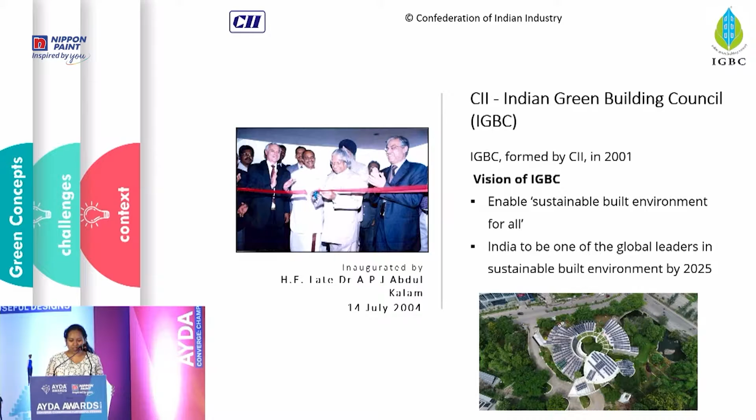Our headquarters, which is in Hyderabad, was inaugurated around 2004 by late Dr. APJ Abdul Kalam, and it was envisioned as a demonstration building where we wanted to practice what we preach. When it was constructed in 2003, it was India's first platinum-rated green building, and it was the greenest building in the world at that time. Even today, we have a lot of visitors who come to take a tour of the building and understand what green features have been implemented in our premises.

We also went one step ahead, and in 2019 we achieved the net zero energy rating for the building. This was achieved by installing bifacial solar panels on the rooftop, which was able to offset whatever energy was consumed by this particular building.

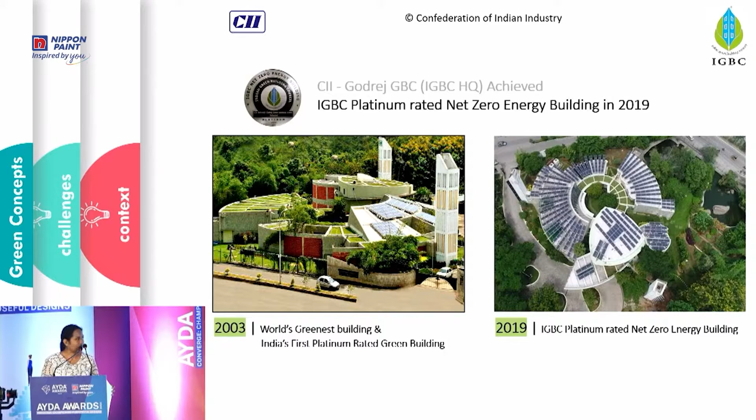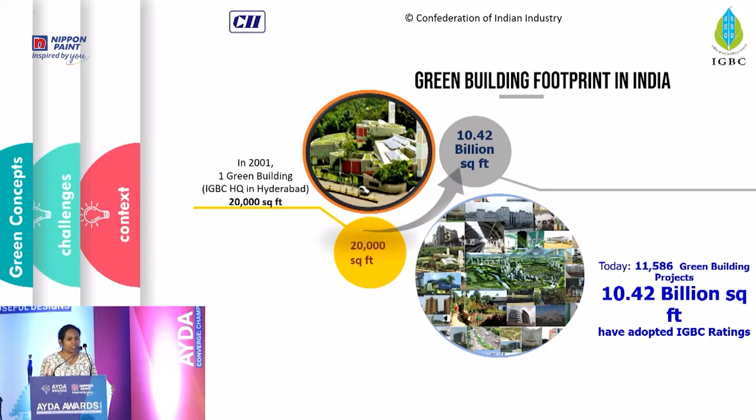To give you an understanding of the green building movement in India, what started in 2001 with one green building of around 20,000 square feet has grown now to almost 10.42 billion square feet of green building footprint, with over 11,500 projects which have adopted these IGBC ratings.

We have developed IGBC ratings for different typologies of buildings - for commercial buildings, residential buildings, industrial buildings, and even for metro stations and railway stations. The main intent was that all of the places where we stay, live, and work should go green.

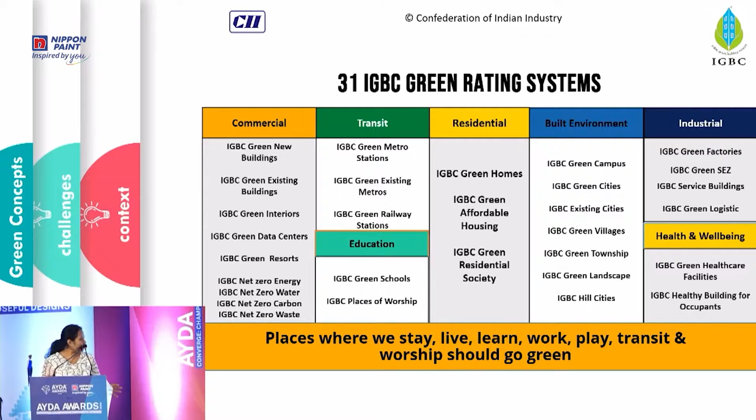So what exactly is a green building? A green building is one which conserves natural resources, uses less water in its operation, and optimizes the energy conserved in the building. It generates less waste and also promotes a healthy environment and improved indoor environment quality.

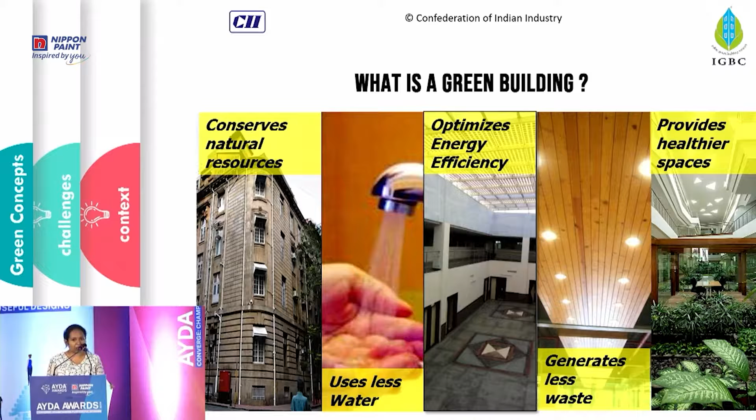The notion everybody usually has is that green buildings cost more compared to any conventional building. But it is important to understand that we have to look at the life cycle cost of the building - all of the operational savings you may have in terms of energy and water will offset whatever initial incremental cost you might incur.

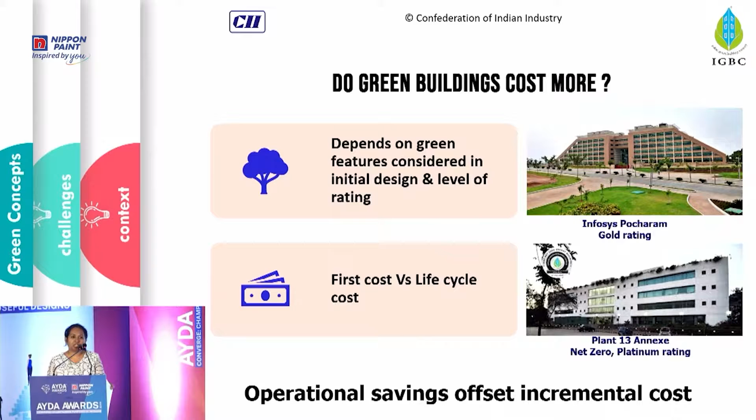We did a study to understand the incremental cost associated with a platinum-rated green building. Back in 2003, this was about 18%, majorly because many innovative technologies and solutions were not available in India and most of it had to be imported. But over the years a lot of technologies are available in our market itself, and this incremental cost has come down to almost only 1 to 2% for an IGBC platinum certified building compared to a conventional building.

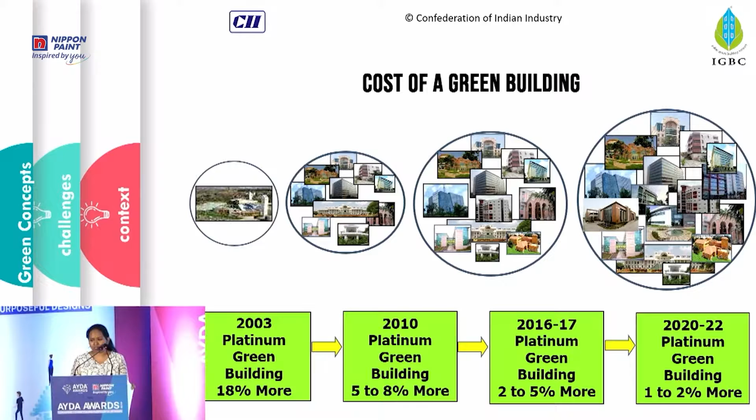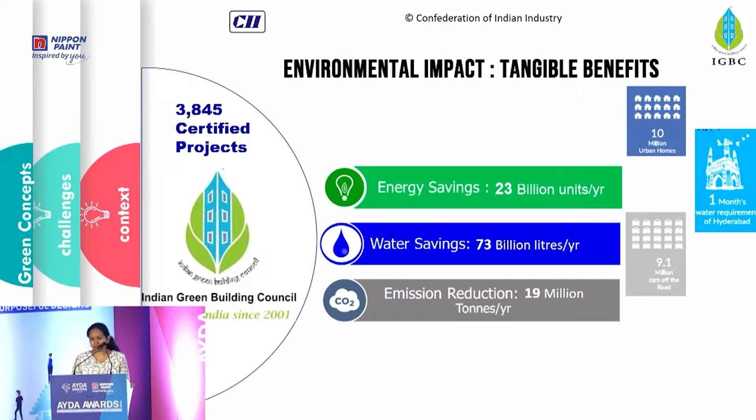Looking at the environmental impact associated with 4,000 certified projects under IGBC, we have anticipated energy savings of about 23 billion units per year, equivalent to 10 million urban homes. In terms of water savings, it's to the tune of 73 billion liters per year, almost equivalent to 1 month of water requirement of Hyderabad. In terms of emissions reductions, it offsets almost 19 million tons of carbon dioxide emissions per year, equivalent to almost 9.1 million cars taken off the road.

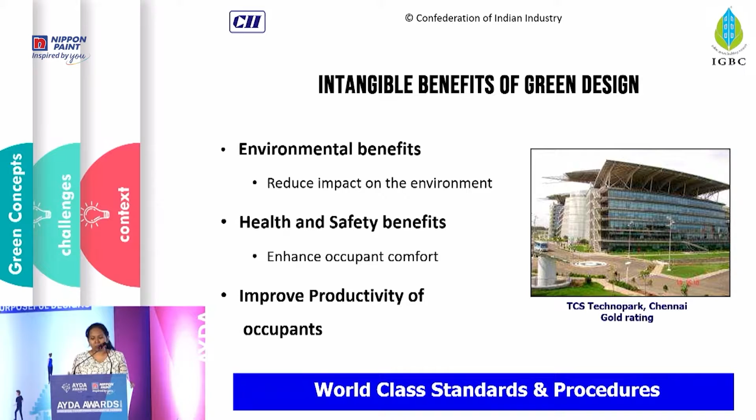With respect to green buildings, you have tangible benefits as well as intangible benefits. We also have intangible benefits associated with green buildings, like enhanced occupant comfort and increase in productivity. This is majorly attributed to the indoor environmental quality of the spaces.

Just to give you an understanding of the impact which the building and construction sector has: if you look at the graph, almost 28% of global carbon dioxide emissions is from building operations, and around 11% is from building materials and construction. So overall, around 40% of global CO2 emissions is from the building and construction sector.

In terms of energy consumption, the sector contributes around 25 to 40%. In terms of waste generation, around 30 to 40% of waste is generated by the construction sector. And in terms of water pollution, it contributes around 20 to 30%. So this gives you the understanding of the impact which the sector has and the need for us to go sustainable.

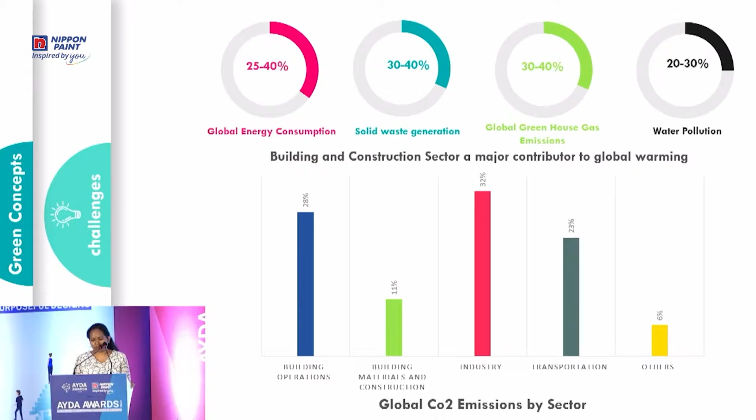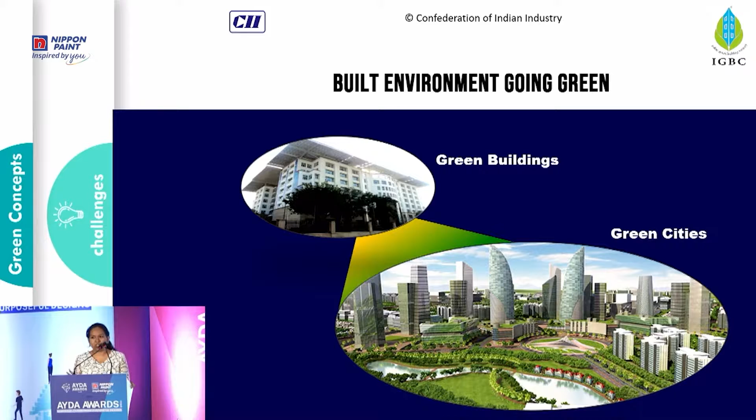So it becomes very important for us to make the built environment go green. Right from green buildings all the way to green cities, we have to design in a sustainable way to ensure that we reduce this impact on the environment.

So let's look at some of the concepts which are associated with green buildings.

Natural topography or vegetation is very important in any project, mainly because this vegetation helps in promoting local biodiversity. Wherever possible, you have to ensure that you try to preserve the natural topography or vegetation which is there on your site. And if it's not possible to preserve it, you can look at ways to incorporate it as part of your design.

You can have it over built structures, as part of terrace roofing, or on top of a podium. So you can look at various ways in which you can integrate your design with the vegetation.

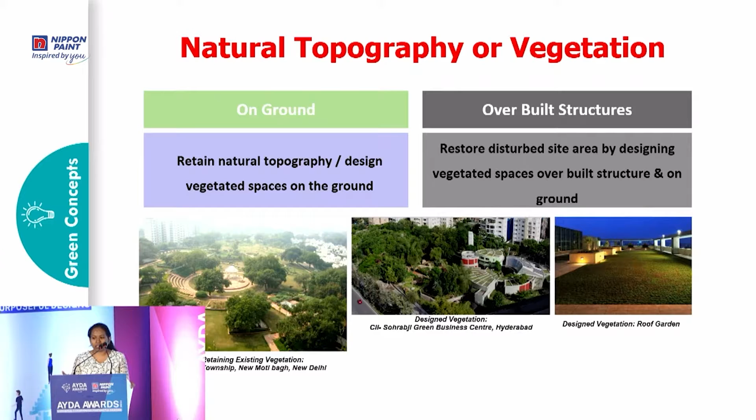Heat island is another phenomenon which is prevalent in major metro cities, mainly attributed to the development which happens in urban cities. Most cities are like concrete jungles, with a lot of concrete surfaces prevalent. These concrete surfaces absorb solar radiation and emit it in the form of heat, causing an increase in the ambient temperature.

If you look at the graph, you can see that the ambient temperature at the city, where there is a lot of urban development, is higher compared to the nearby suburban or rural areas where the temperature is much lesser. So we have to look at how we can mitigate this heat island effect.

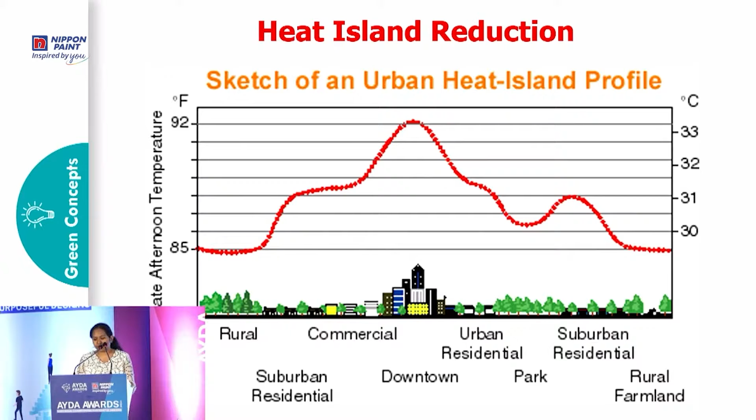Let's look at two ways in which we can mitigate this heat island effect: one is the non-roof areas and the other is the roof areas. Your non-roof areas consist of all your paved areas, including driveways, pathways, and parking spaces. You have to ensure that you try to shade these spaces with the help of tree cover, or look at using some kind of open grid pavers or grass pavers.

In open grid pavers, there is a gap prevalent between two pavers. This gap basically acts as a thermal break and prevents the conduction of heat. Grass pavers are both aesthetical and also help in providing a cool environment. So these are some of the options you can consider in your non-roof areas for mitigating the heat island effect.

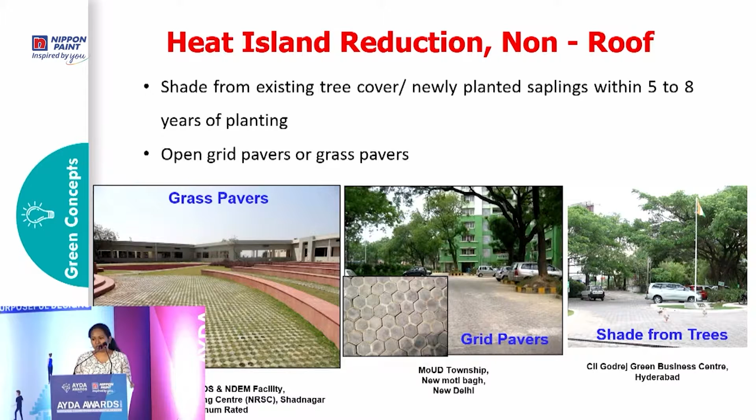Coming to the roof or terrace area, you have to consider high reflective materials on your roof area. These can be either high reflective paints, high reflective tiles, or you can even consider something as simple as China mosaic roofing, where you can reuse all your broken tiles to provide a China mosaic roofing.

Or you can also look at how you can have a roof garden, with a vegetative roof on your terrace, or a combination of both of these.

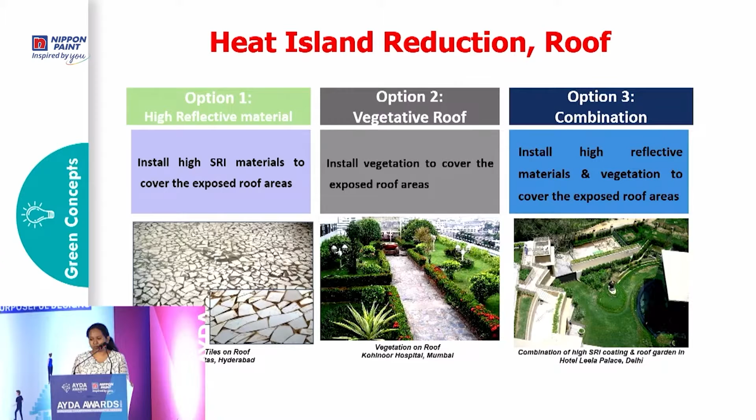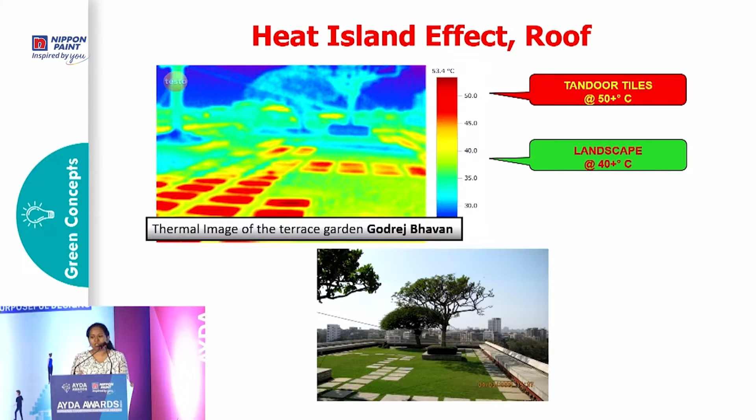Water is another very important concept when it comes to green buildings. We have to follow the 3R principle for water efficiency: recharge, reduce, and reuse. Generally we have the tendency of always drawing water from groundwater sources without replenishing them, so we need rainwater harvesting structures in the project to replenish these sources. We also have to choose efficient fixtures in washrooms to reduce water consumption. The third R, reuse, means wastewater generated in the building should be treated and reused for flushing or irrigation purposes.

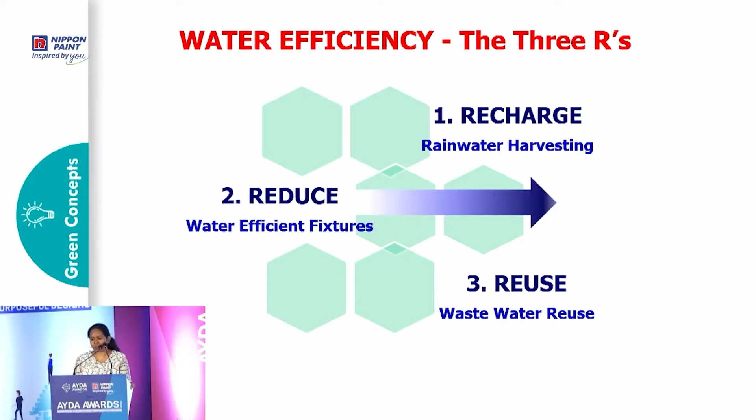Coming to the first R, recharge: in terms of rainwater harvesting, there are two options. You can collect rainwater on site and reuse it, either with a pond or water body, or a storage tank, channelizing all your stormwater drains to collect at this point. The other option is recharge, where you let rainwater recharge the groundwater table by planning percolation pits or bore wells.

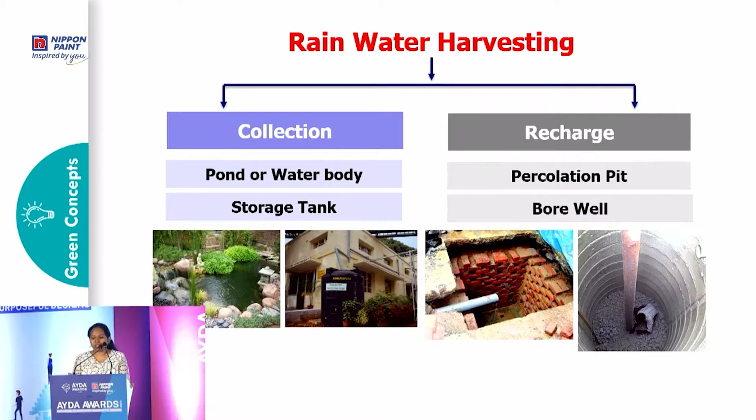Coming to the second R, reduce: we need to look at the plumbing fixtures used in the project. There are two types of fixtures—flow fixtures, which are your taps, health faucets and showers, and flush fixtures, which are your water closets and urinals.

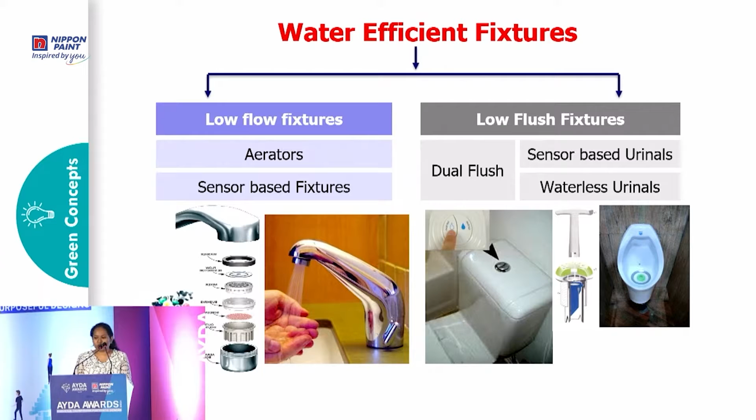For flow fixtures, you can consider using aerators, which are very economical and easy to fit onto any fixture, restricting and reducing the water flow. For flush fixtures, new technologies like dual flush systems give you a half flush or full flush based on need. For urinals, you also have sensor-based and waterless urinals, which optimize the water consumed by the fixture.

Another important aspect of water conservation is irrigation requirement for landscaping. It's important to choose the right species in your landscape design to optimize irrigation needs. Generally we go for exotic and flowering species, which have high watering and irrigation demand. Instead, we should research native species available in that region, which generally require watering only in the initial sapling stages and afterward survive on their own based on the rainfall pattern of the region.

You can also consider drought-tolerant species like cactus or some varieties of palms, which require very little water. The third type to consider is adaptive species—not native to a region, but prevalent there for hundreds of years and adapted to its climatic conditions, also requiring very little water. These three species should be considered while developing your landscape design, avoiding exotic species to reduce irrigation water demand.

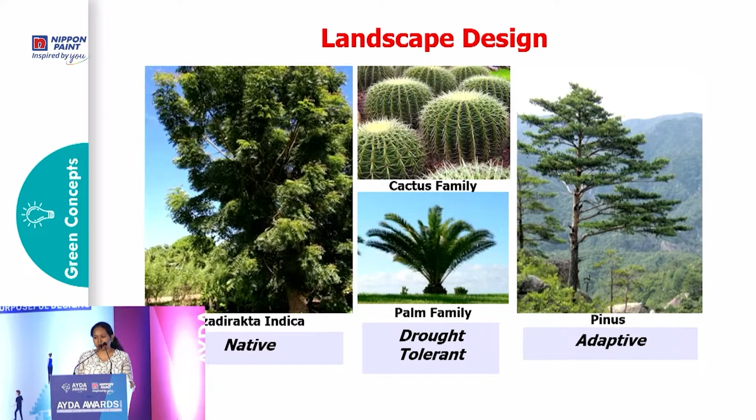One aspect of irrigation is the landscape design, and the other is the kind of irrigation system used. You need to choose an efficient irrigation system, and there are two types to consider. One is the sprinkler system, which is advisable for turf areas and can reach a larger surface area with very little water input—much less than a conventional hose pipe for watering turf.

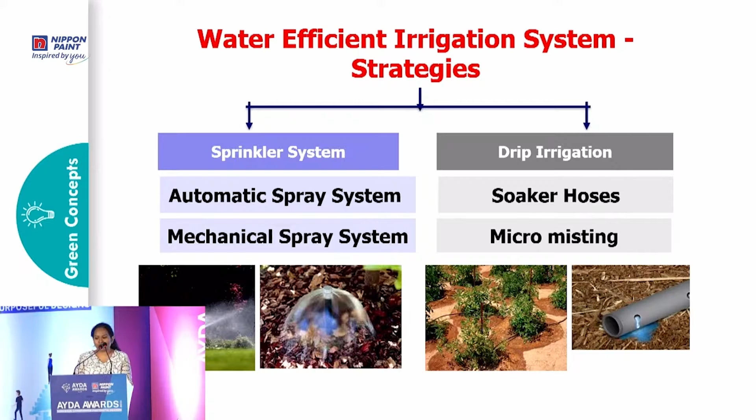Drip irrigation can be considered for other vegetation like shrubs and trees. In drip irrigation, pipes are laid across vegetation beds with holes from which water drips to the root zones. These are some of the efficient irrigation technologies you can consider compared to a conventional hose pipe system.

Coming to the third R, which is your reuse. Wastewater treatment is how we can treat the wastewater generated in your site, and then we can reuse this particular water for your flushing purposes or your irrigation requirements.

There are two types of wastewater treatment available. One is biological treatment, where you use plants, the root zone of the plants, to treat the wastewater, or you can go for mechanical treatment with the help of a sewage treatment plant. In both processes, the important process which happens is the aeration process, where you're basically adding air to break down the waste particles present in the water.

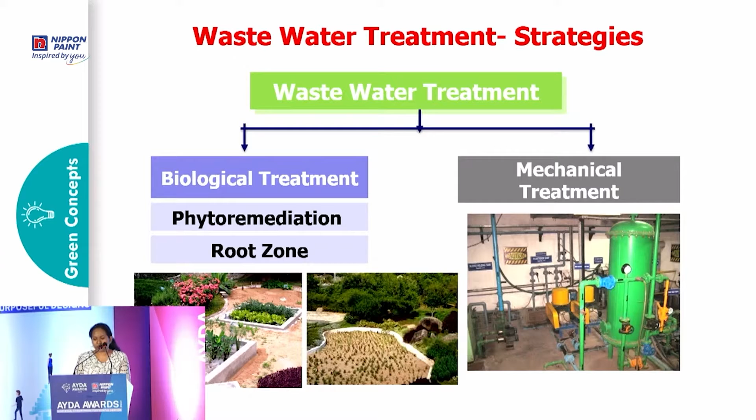If you look at this photo, this phytoremediation plant is from our headquarters. If you see, it might look like just a garden, and even if you walk around it, there is no foul smell which will emanate from this particular phytoremediation plant.

This process is again repeated in your polishing pond, which is your secondary treatment chamber. Once it comes out of the secondary treatment chamber, this water can be stored and reused for your landscaping or flushing purposes.

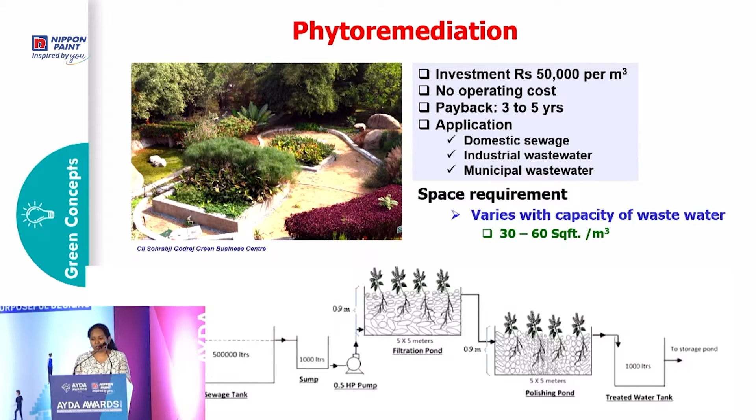Energy efficiency is very important when it comes to green buildings, because energy used for HVAC and everything will take up most of the operational energy used in a particular building. So how do we optimize this particular energy being used in your building?

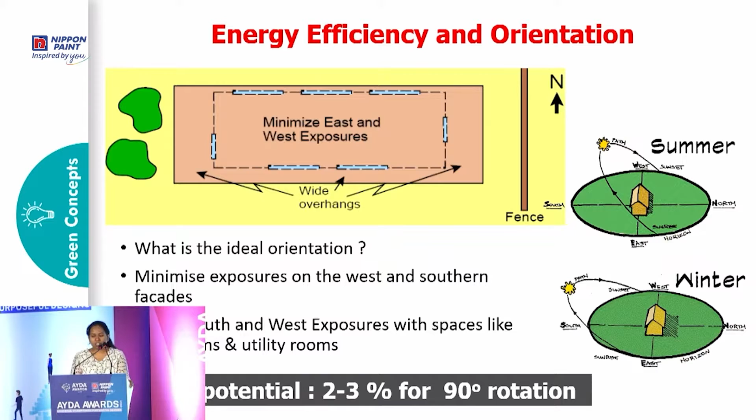You will have to ensure that you minimize your openings on the southern and western facades so that you can reduce the heat gain into your building. You can also plan for buffer spaces or service areas like staircases, washrooms, and utility spaces in these southern and western regions.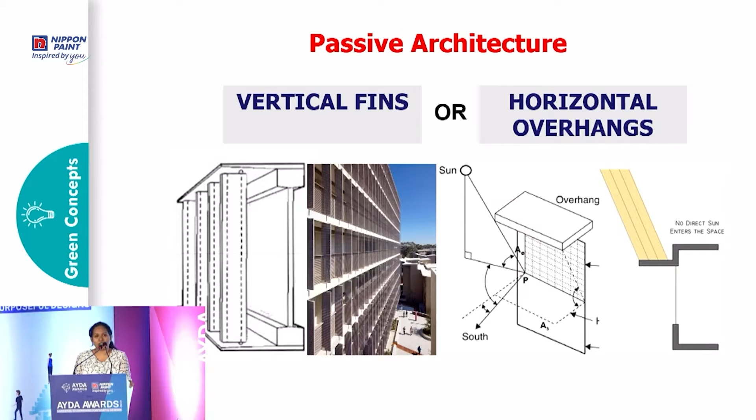Everybody knows the importance of vertical fins and horizontal overhangs. They also have to be properly designed to ensure that the heat gain inside your building is reduced.

There are also some passive technologies available, like earth air tunnels. They basically work on the principle that the earth remains at a constant temperature of about 22 degrees Celsius. In this technology, you take pipes to around 4 meters below the ground.

When your ambient air is around 30 to 35 degrees Celsius, the hot air is taken through this pipe to 4 meters below the ground, where it gets cooled by the earth, which is at a much lower temperature of around 22 degrees Celsius. Then this cool air can be taken to recirculate inside your building.

This also works in cities with extreme climates where winters are really cold. When your winters might be 4 or 5 degrees Celsius and your earth is still at the constant temperature of 22 degrees Celsius, you can take this cold air from outside to 4 meters below the ground and it gets warmed up. Then this particular air can be taken to recirculate inside your building.

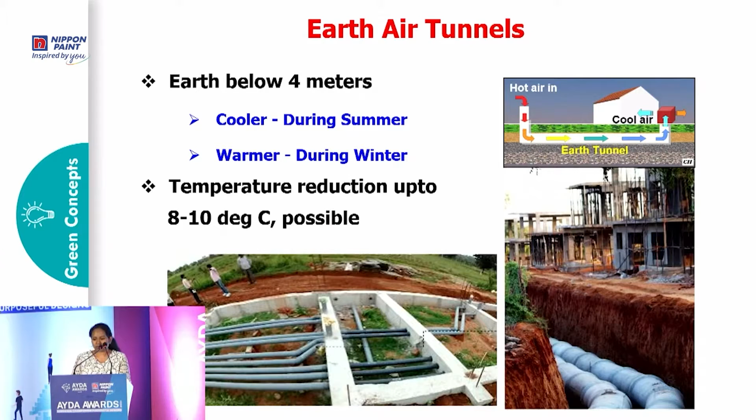Wind tower is another passive technology which can be used for passive cooling. What happens in a wind tower is that hot air enters from the top of the tower, and you have mist sprayers located at the top. These mist sprayers spray water particles and cool down this hot air entering from the top, so this hot air starts to settle down.

On the other hand, you have a solar chimney, which heats up the air inside your building and causes it to rise. There is a pressure difference which occurs, and it makes the cold air from the wind tower come inside your building. Through a wind tower, you can anticipate a drop in air temperature of around 4 to 5 degrees Celsius.

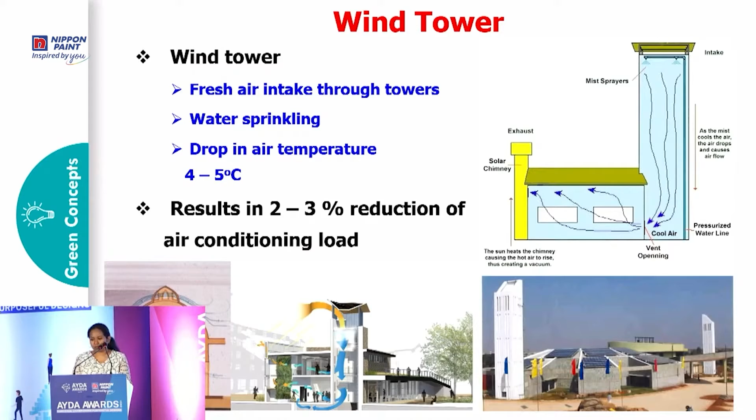Coming to building materials, in all of your projects you have to look at how you can reduce the dependence on virgin materials. Wherever possible, if it's an existing building, you can look at how that building can be reused. Or if it's a new development, you can look at how you can reuse salvage materials, or use materials with recycled content. You can also look at how you can source locally available materials, which will help in reducing the carbon dioxide emissions associated with transportation of materials.

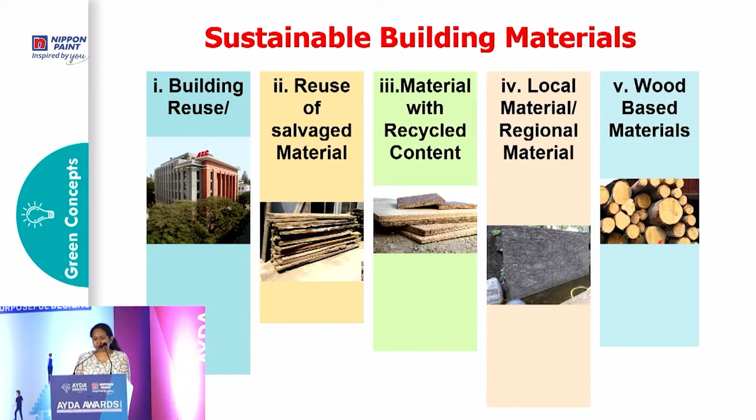This is an example of a project, the Ambuja Cement Corporate Office. Generally, the structure of a particular building has a life of around 60 years. What happened here is that they've gone for a major renovation and retained the structural elements of the building, only doing renovation in terms of the envelope and the interior. In this way, they have reduced the virgin materials used in the project.

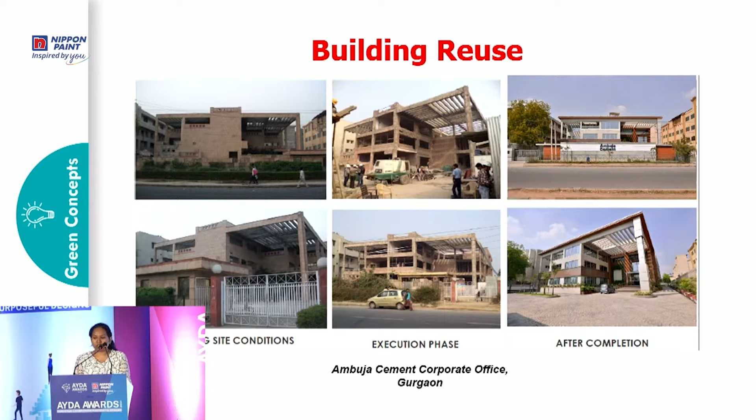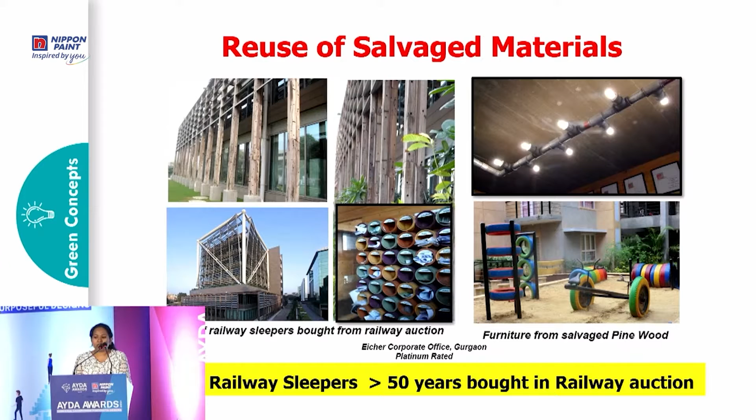You can also consider reusing salvage material. This is an example of the Eicher office in Gurgaon, where they have actually bought railway sleepers from a railway auction and used them as the double skin for the project. There are also some photographs showing how pipes can be used along with your lighting fixtures, and empty paint cans can be used for storing documents. So you can look at how you can salvage materials and reuse them in your project.

Coming to wood-based materials, you can consider two types of products. One is rapidly renewable materials - rapidly renewable wood is something which can be harvested in less than 10 years, including species like bamboo, bagasse, and eucalyptus. The other option is certified wood, which is wood harvested from forests that are responsibly sourced and managed, and these are environmentally conscious.

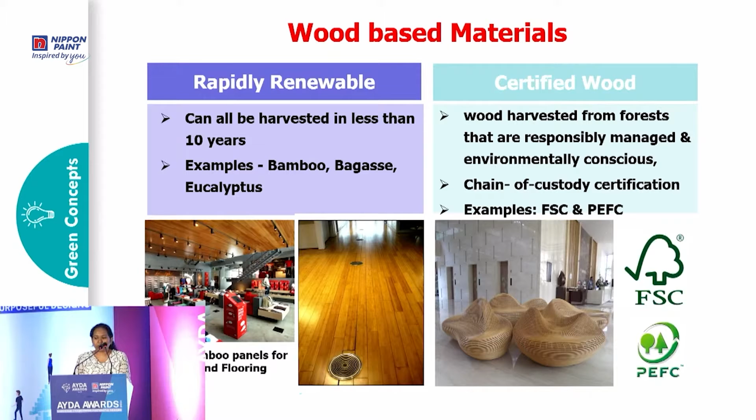In terms of waste generation, during project construction it is important that you manage the waste getting generated. First, you have to look at how you can minimize the waste generated during construction. The waste that is generated needs to be properly segregated and stored on site, so that it can be reused. For example, broken bricks can be reused for backfilling, and broken tiles can be reused in pavers and even terraces. This way you can reduce the amount of waste being sent to the landfill.

After reusing whatever waste is possible, the leftover waste should be associated with recycling vendors who can take up this waste and use it for recycling purposes, ensuring it does not go to the landfill.

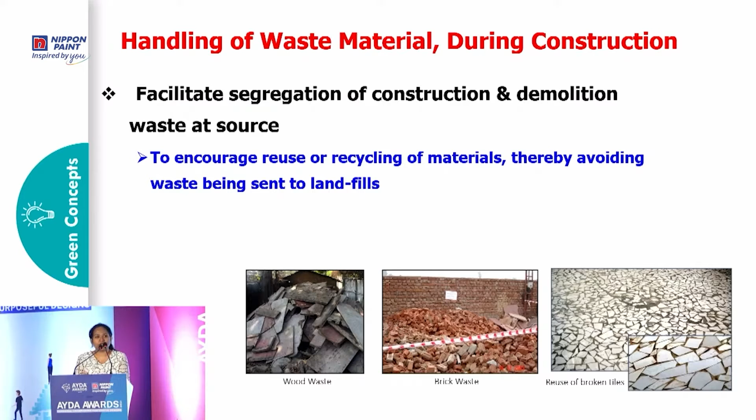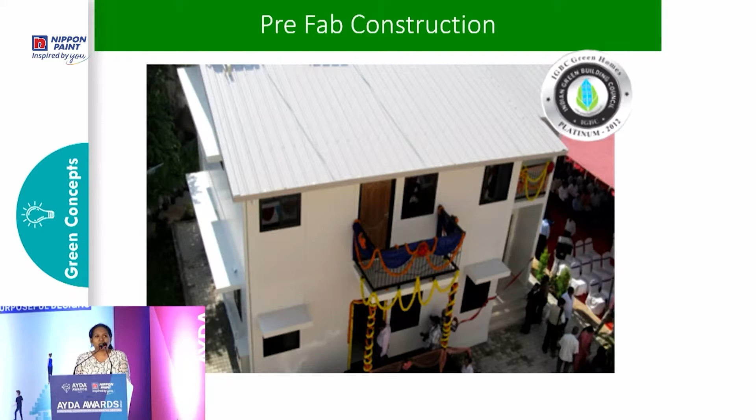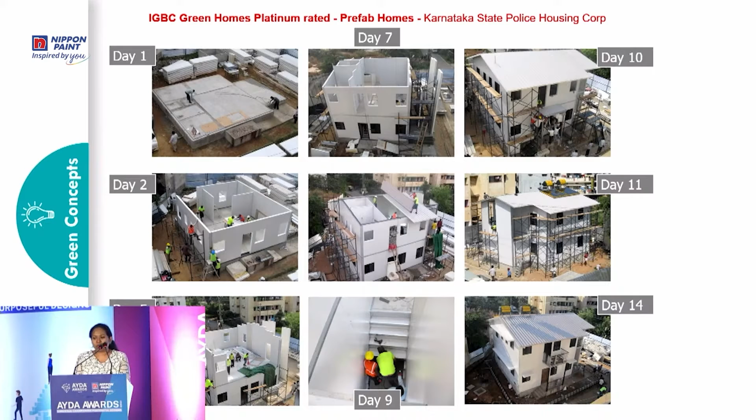There are also construction technologies available where the amount of waste generated itself is very less. For example, in prefabricated construction, the panels are actually prefabricated and then just assembled on site, so the amount of waste generated during construction is very low. You can look at considering these kinds of technologies in your projects. There is also 3D printing technology, which is another option to consider.

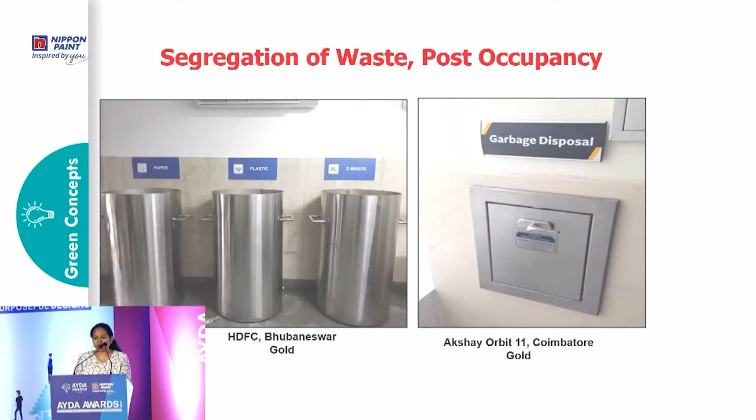The other aspect of waste is during the operations phase of your building. You will have to ensure proper segregation and recycling so that you can have a circular economy. There are many advanced systems available for waste management, like automated solid waste management systems where waste segregated at the source is sent to pneumatic chutes. These chutes work based on pressure difference and run across all floors, collecting the waste in a central location, from where authorized vendors can pick it up for further processing.

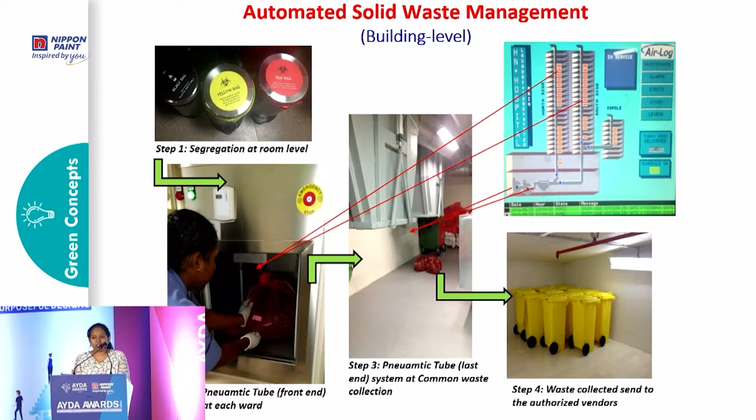Organic waste is also something which can be managed on your site itself. Organic waste includes both landscape waste and food waste generated in a project. You can look at natural processes like vermicomposting, which uses earthworms to break this down into manure, or you can also look at leaf composters. On the other hand, there are mechanical processes available like organic waste converters.

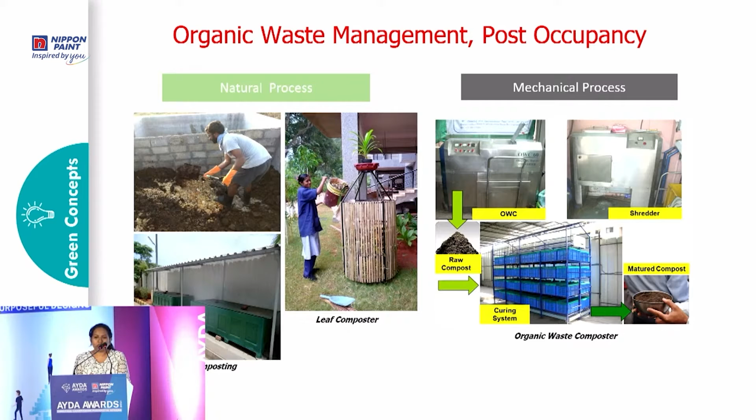In these converters, there is a shredder first which shreds all the waste, and then a biocompost is added along with the organic waste to break it down further. This raw compost is stored in curing racks, and after curing, the output from this machine can be used as manure for your landscaping purposes.

Indoor environmental quality is one of the intangible benefits associated with green buildings, and it is majorly affected by 3 parameters: air quality, the materials used in the building, and connectivity. Connectivity includes connectivity to outdoors and the kind of daylighting in the building. All these 3 parameters determine the indoor environmental quality.

Any building with poor IEQ is associated with something called sick building syndrome, a medical condition where people in a particular building suffer from symptoms of illness or feel unwell for no apparent reason. This is majorly attributed to the poor IEQ of the particular space.

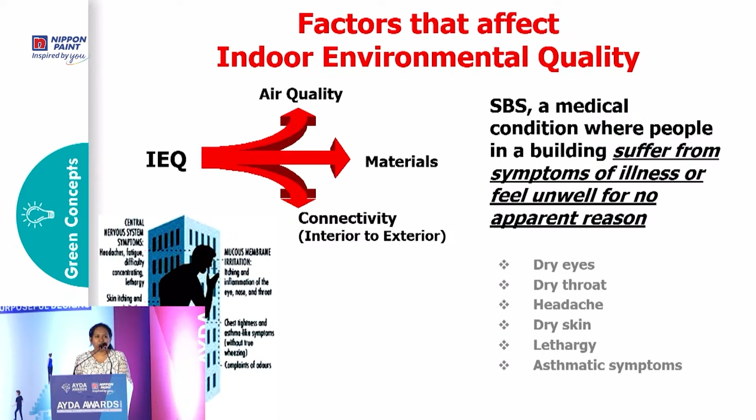Fresh air ventilation is the most important parameter when it comes to indoor environmental quality, as it ensures the comfort and well-being of occupants, and it increases their productivity.

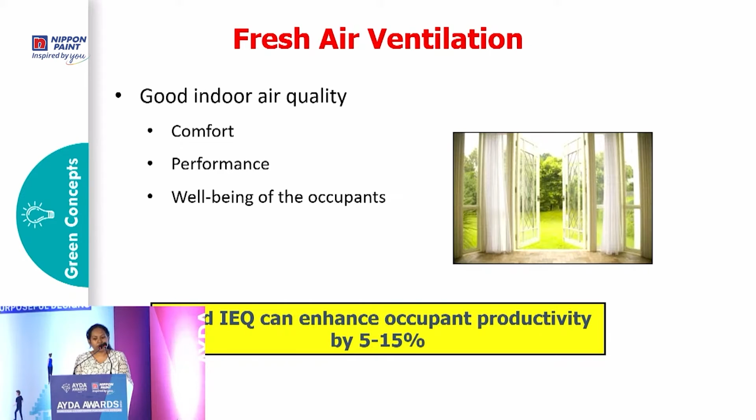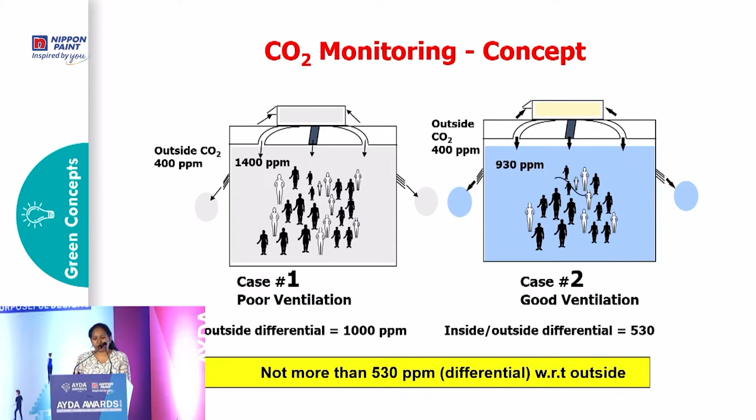Another important aspect with respect to ventilation is demand control ventilation. Generally, conventional ventilation systems are predefined — they predefine the amount of fresh air sent to different spaces. Whereas in demand control ventilation, the ventilation demand is determined by the carbon dioxide level in that particular space, so the fresh air is adjusted based on occupancy.

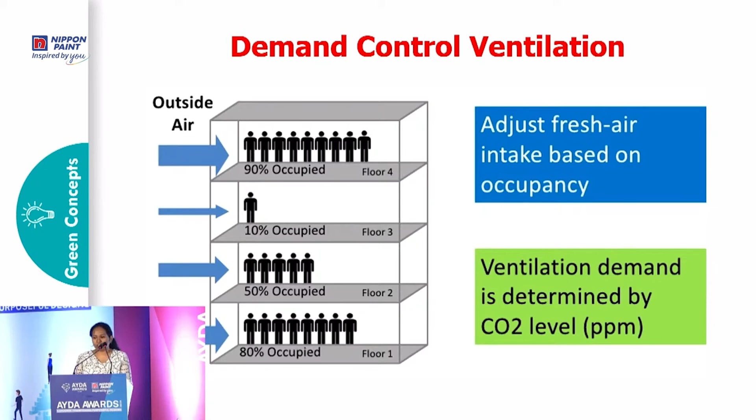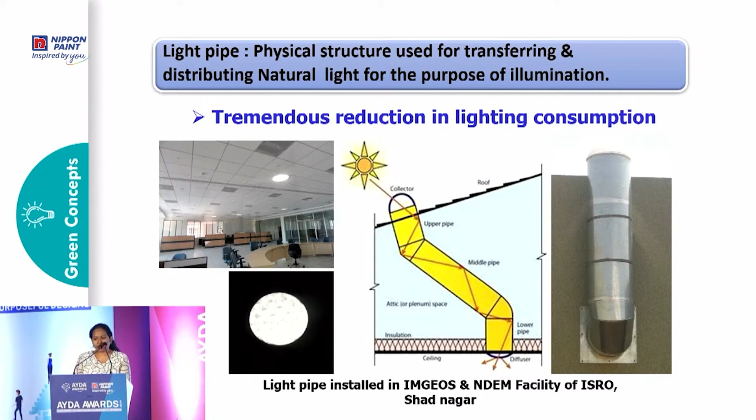Daylighting is another important aspect that helps provide better indoor environmental quality. A light pipe is one technique for deeper penetration of daylight into the interiors of a building. It has a collector on the rooftop and a highly reflective pipe — light rays collected from the roof get reflected through this pipe and diffused into the interior of the building.

Light shelf is another technique for deeper daylight penetration. In conventional windows, daylight can typically penetrate to about 30 feet. With the help of light shelves, which are lined with reflective material, you get deeper penetration of daylighting into the interior of your space.

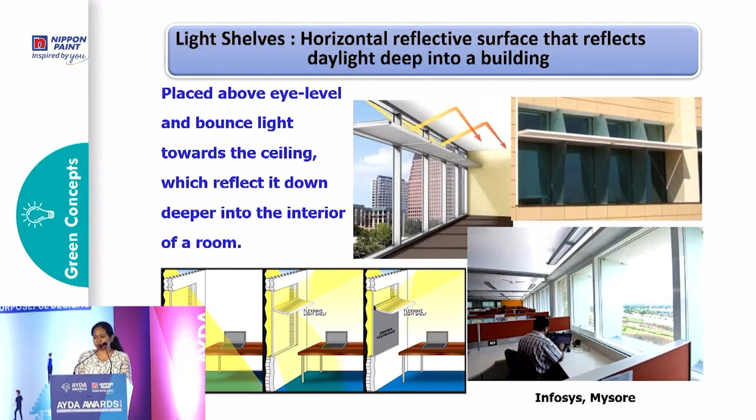With that, I come to the end of my presentation, where I wanted to cover the various concepts associated with green buildings. If you have any questions or need any information, you can always write to me. Thank you.